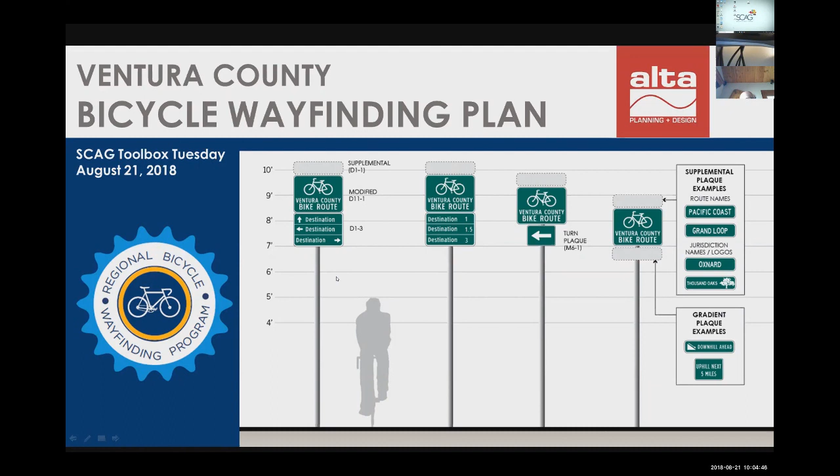The Ventura County Transportation Commission, a few years back, sought to fund more substantial and transformational bike projects within Ventura County, but there were a number of barriers standing in the way. One is that if you're familiar with Ventura County, we have a number of progressive land use ordinances that have kept all 10 of our cities very separate. There are no contiguous borders, so each city had a fairly developed...

I lost my presentation for a moment, but as I was saying, in Ventura County we have fairly restrictive land use ordinances that shunt all growth into cities. So there are large tracts of land undeveloped or in agriculture under cultivation between cities.

Because of that, each city has a pretty substantial bike network, but between cities, the connective tissue wasn't there—there wasn't a network of bike lanes to support a regional bike network or bike travel. There was no adopted bicycle master plan by the county, which would allow for development.

So VCTC undertook the task of putting together a plan, under the auspices of the Ventura County Bicycle Wayfinding Plan. One of the other things we wound up taking on, which you won't see in the slides but I'll talk about at the end, was that in Ventura County there's also no transportation measure providing local funds for match.

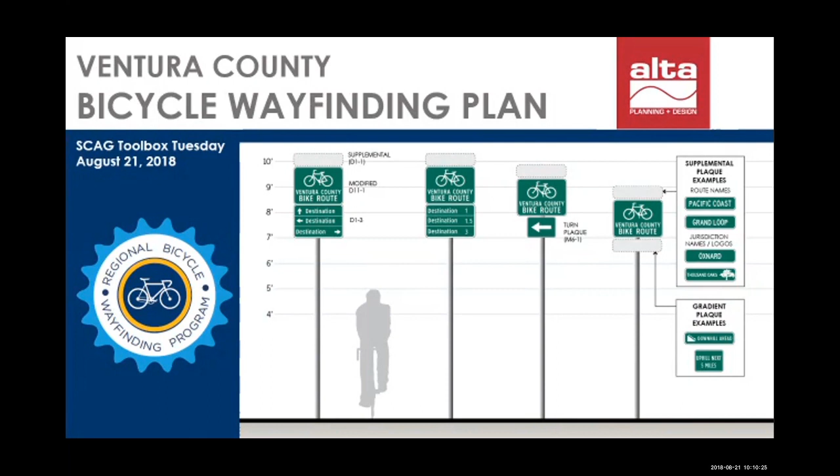Through the RFP process, we hired Alta Planning and Design to conduct our wayfinding study and to identify and prioritize a network of regional bike paths. Ultimately, it led to the adoption of 17 routes, 413 miles, with uniform signage throughout. I'll walk you through the process by which we did that.

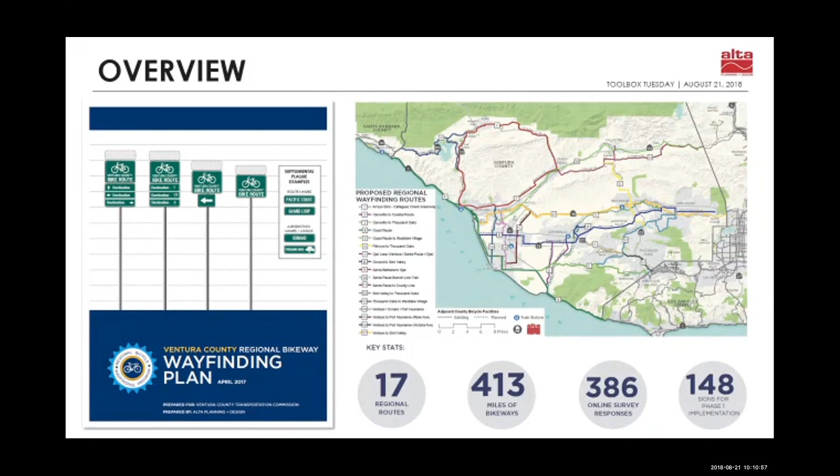We separated the project into three component parts. Wayfinding foundation—this is really the guiding principles for this project. The point of the project, and what we drove home, was connectivity between cities and between our neighboring counties, and connectivity by real users.

By that I mean we engaged real cyclists. We had city staff participating in the project, but more than that, we emphasized making sure we had real riders. We engaged local bike clubs and bike advocacy groups to ensure that we were capturing where people really wanted to ride rather than where the engineers thought we should put routes.

The second component was to really cinch down route paths, to know turn by turn where the routes were going, and then to prioritize them to aid in future development and funding.

Lastly, in the plan was a wayfinding toolkit. We designed signage that would be common throughout the county so that people would understand from community to community that the bike path was continuing on—that was more of an adventure than the previous two elements.

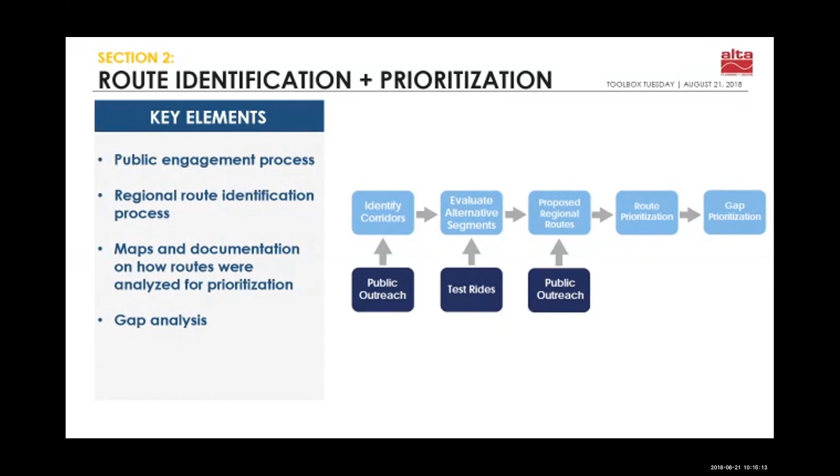We started intuitively, knowing roughly where the routes should go. So we started with 17 proposed routes, focusing on connectivity. We knew not all of the routes we proposed were suitable for building, but we thought this was a good place to start, and that we would deconstruct and reconstruct them as the project went on.

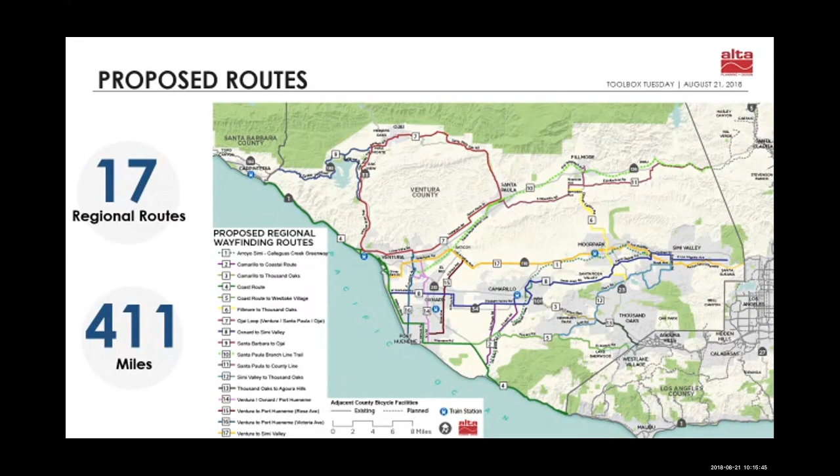One of the more non-traditional avenues we took for outreach was taking those proposed routes and all the existing routes within Ventura County and creating a bike wiki. We let the general public log into the bike wiki, draw their own routes, and provide comments. We garnered 278 individuals and some 686 comments, with people drawing their own routes, where they wanted to go, commenting on existing routes down to things like shrubs that need trimming, potholes, or a bad connection from Moorpark to Simi that should be rerouted. The range of comments gave us really great public input. We felt we had very tight, specific comments that allowed us to then propose much more succinct routes.

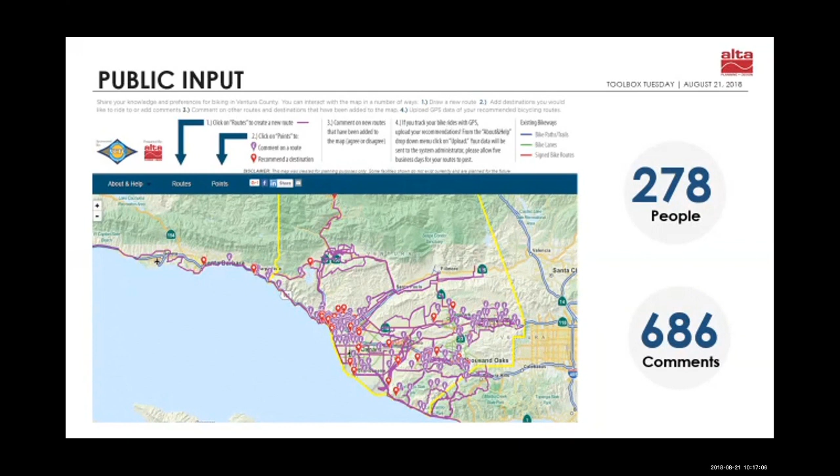Before you could log into the bike wiki, you had to take a short survey so we could identify who was commenting. Not surprisingly, most of our comments came from fairly confident recreational riders—weekly, very regular riders, most of whom felt comfortable riding on the road with or without shoulders. But at least we had a sense of who was commenting, and I think this is common throughout the region, where most riders are recreational. We did have some commuting public, almost 20% of respondents were commuters, but the vast majority were recreational riders comfortable on the streets.

We took all of that public input and our proposed routes and did an evaluation of those routes. We prioritized and evaluated the routes by a number of weighted criteria. We looked at route readiness—is the infrastructure in place? Are there shoulders? Are they paved? Could we pave them? Are we cut off from completing a route by any geographic feature? We have a very large grade that separates the county, so we had to find ways around that.

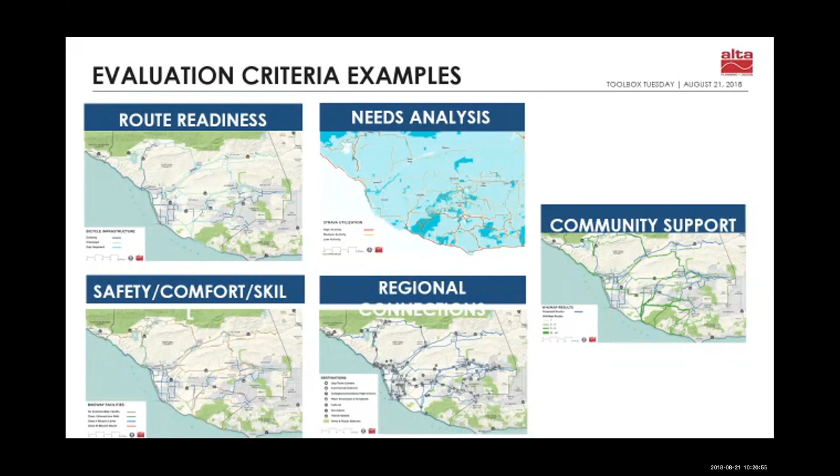The prioritization of the routes really helped in two main ways. It allowed local jurisdictions, especially the unincorporated county, to have some objective criteria when it came to investing in these routes. And this really helped later on when we changed the funding scenario and brought money to bear on route development.

The characteristics of high scores versus low scores: a high score would mean a high degree of readiness. There were shoulders wide enough to pave, it was a comfortable ride, it had good connectivity and heavy community support. A low degree of readiness meant there were maybe high traffic speeds, narrow shoulders, and less public support.

Because of the weighted scoring, this was not simply a popularity test. The highest route in popularity actually wound up scoring very much in the middle of the pack because it didn't serve as many people. It didn't connect communities as well as some of the others. So although it was popular, it ranked lower on the route.

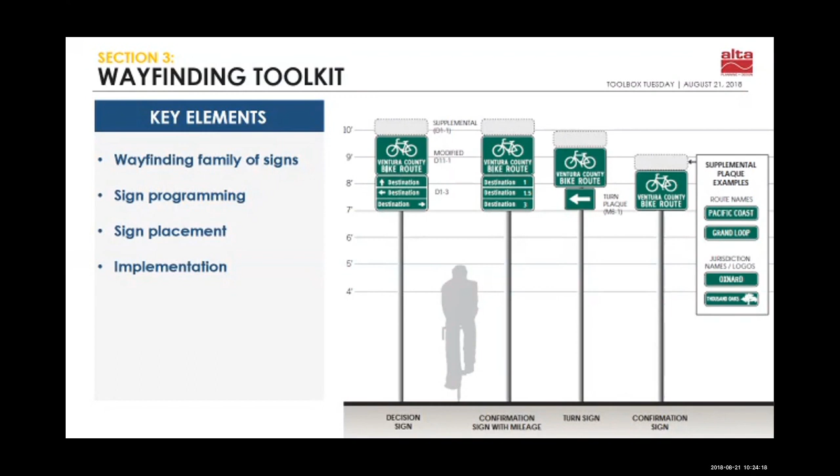The Oversight Committee actually adopted the signage in the Manual on Uniform Traffic Control Devices, the MUTCD, which we're all familiar with, and a simple modified D11-1 bike guide sign is what they chose to adopt.

What they wanted to make sure of, though, was that all signs had the opportunity for branding, so you could do a sign topper, so that if a jurisdiction chose to brand any particular route - and we have some groups in Ventura County working on bike tourism within the county - such as the Pacific Coast route, or a very difficult route that winds through the mountains and more scenic areas of Ventura County called the Grand Loop, we could put these toppers on top of the simple signs to identify those.

Also, it was found that simple warning signs for grade were really important, so very generic uphill, downhill signs were recommended. We maintained the standard MUTCD colors so that if you leave Ventura County, these signs would still be common on your ride. Although they're not terribly ornate or sexy, these were the signs our committee found would provide the best value and be easiest to maintain over time.

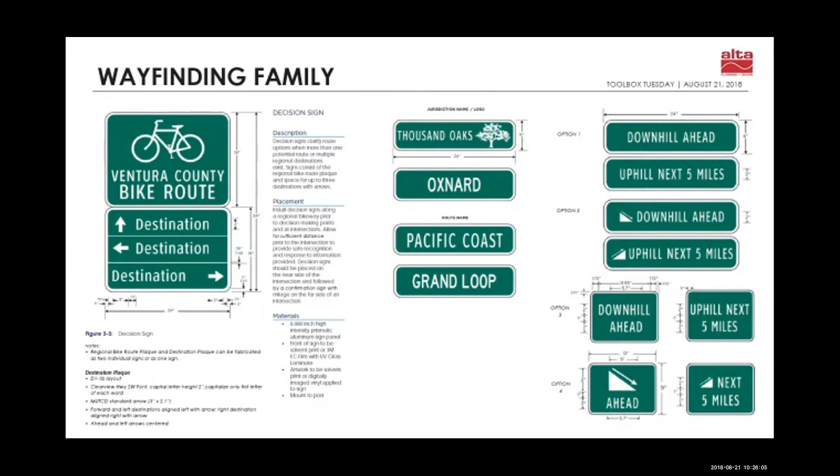We looked at 18 specific locations to inform communities of how things should be signed, and we created detailed instructions of how these signs should work, where they should be placed, how many feet from the intersection. This provided a toolbox that every city could use in terms of sign placement.

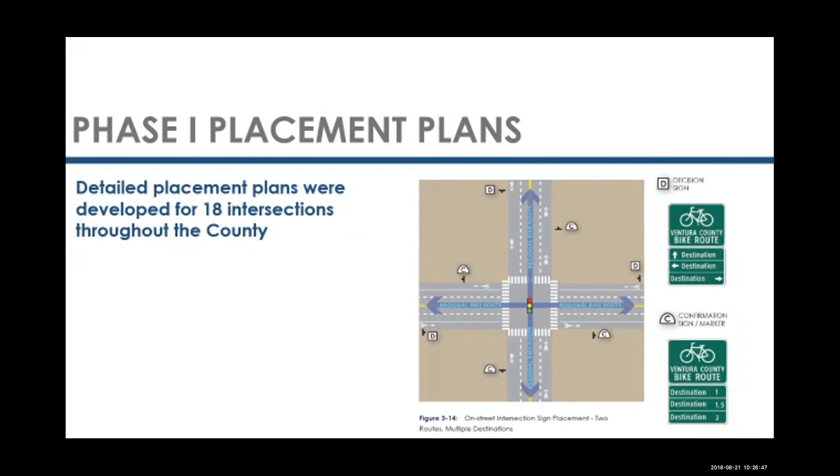We had funding for a number of signs as part of the project, and the committee selected 18 locations that would provide signage throughout the county and allow riders to make crucial turning movements. But as we started with that, the city sort of took over and started to put signs up on their own according to the plan.

One of the things that took us by surprise once signs actually started to go in was that in the committee structure and signage debate, we chose as a group not to name routes. We numbered the routes so we could discuss them for planning purposes, but the numbering convention was not designed to be a naming convention.

However, when signage came to implementation, a number of the communities really wanted to use the numbering system that the wayfinding plan had identified. So by default, the numbering system we used became the default route path. Then there were discussions to keep continuity with other designations, so since adoption of the plan, we've actually changed the route numbering system to match other naming conventions within the county.

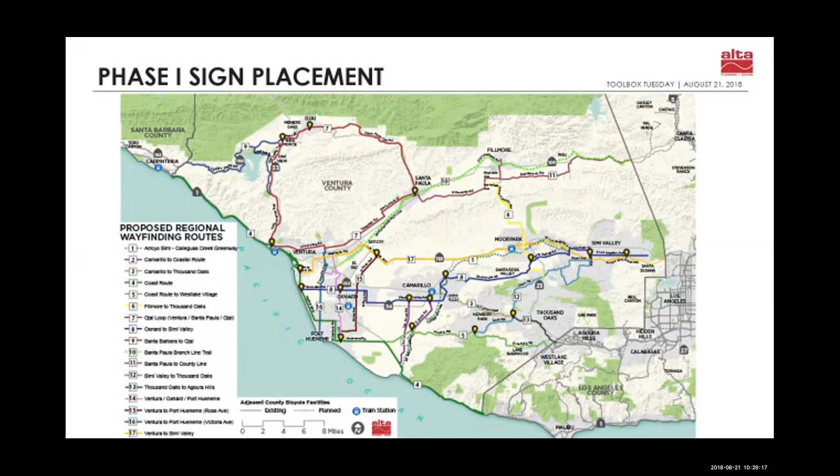Most prominently, if you're looking at this map, Route 4 goes down the coast. But of course, in California, we know that Route 1 traverses the coast. So we've since changed the wayfinding Route 4 to Route 1 to match the coastal route. That was an interesting turn we didn't anticipate, but we've accommodated that wish by the communities.

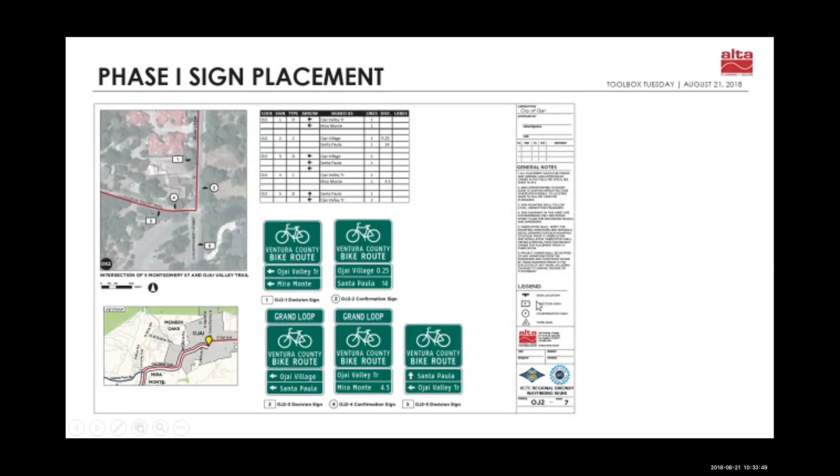Great, thanks Steve. So my name is Christopher Zhang. I'm from the Western Riverside Council of Governments, and I'll be discussing our recently approved active transportation plan.

Next slide, please, India. So I wanted to start off the presentation with opportunities and challenges in the WRCOG subregion, so that hopefully participants have a frame of reference while I describe the plan and the process. Next slide.

So when we discuss opportunities, we think about attractions and destinations, basically where people want to go via walking, biking, or driving. Contrary to the perception of the Inland Empire, we have a lot of opportunities here, I believe.

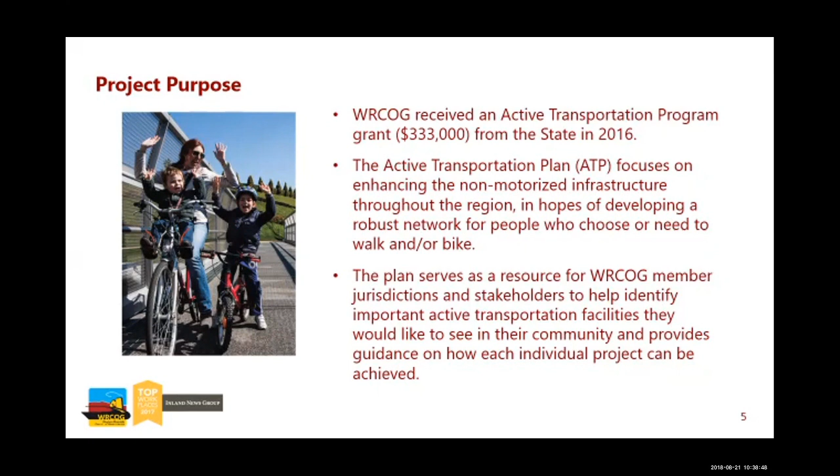As we developed the plan, we utilized our existing committees for outreach, including a monthly committee meeting with planning directors and public works directors of our member agencies as a sounding board. We also utilized stakeholder groups such as the Riverside County Active Transportation Network as advisors for input and feedback. In 2016, we established goals and objectives and developed a draft network, spending much of the last year refining facilities with agency staff and drafting the plan.

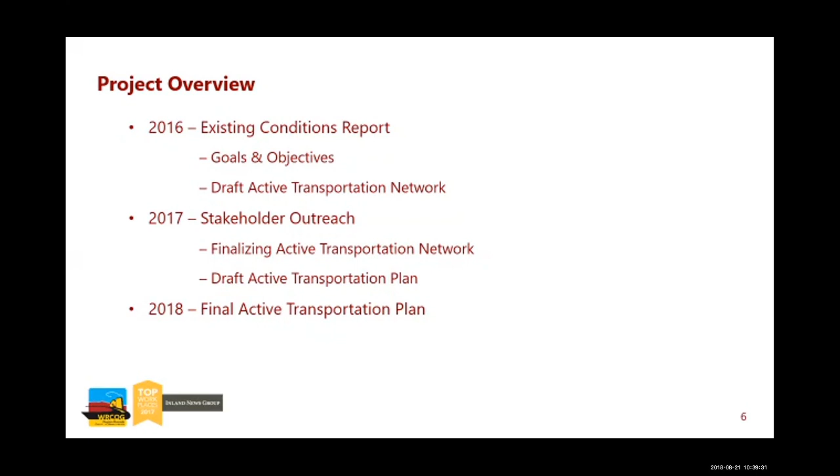The plan contains the listed items on the screen. I'll go into more detail in the coming slides, but one item of great interest to our jurisdictions was the collisions analysis, which is included in the plan—I'll get into more detail on that in the coming slides.

What we're really trying to achieve with the plan is just the beginning. We did a non-motorized transportation plan for Western County in 2010, but noticed that no projects were being implemented, so we wanted to take a different approach with this 2018 plan, which I'll get into a bit more.

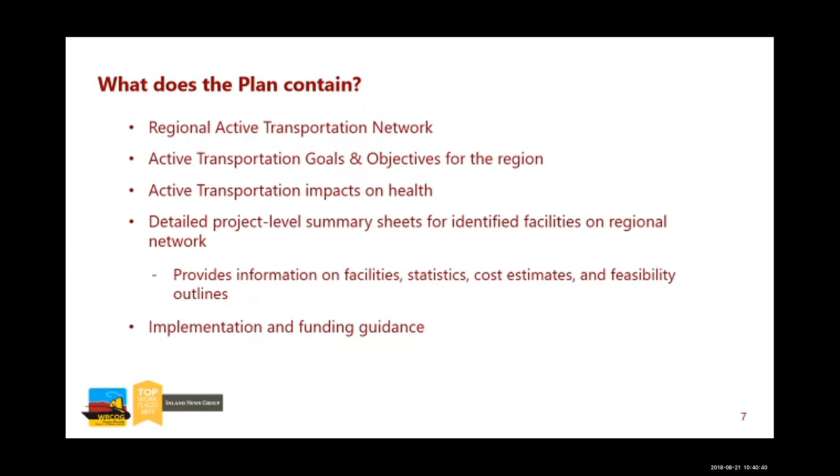What we're trying to do with the plan is provide assistance to our member agencies if they're really interested in providing additional active transportation options. This goes back to our goal—we're not trying to force anything upon our jurisdictions, we're just trying to assist those that would like assistance.

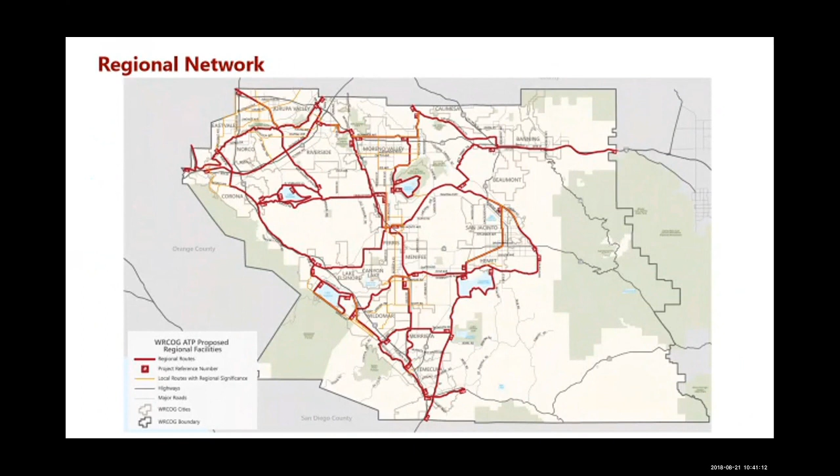One of the items listed was the regional network. Here's a look at the network identified with assistance from jurisdiction staff. We also looked at input from prior local and regional plans, collision review, and analyzed regional destinations, going back to the importance of analyzing where people are going and would want to go with what's offered in the subregion.

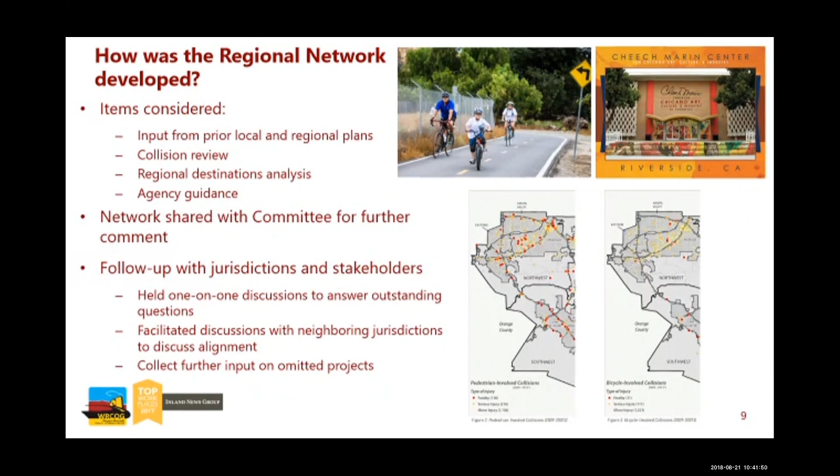This is what we really wanted to highlight with our active transportation plan: detailed project-level summary sheets for each identified facility on the regional network. We spent probably a year or more on these project sheets, because the information provided is what's required on the ATP application.

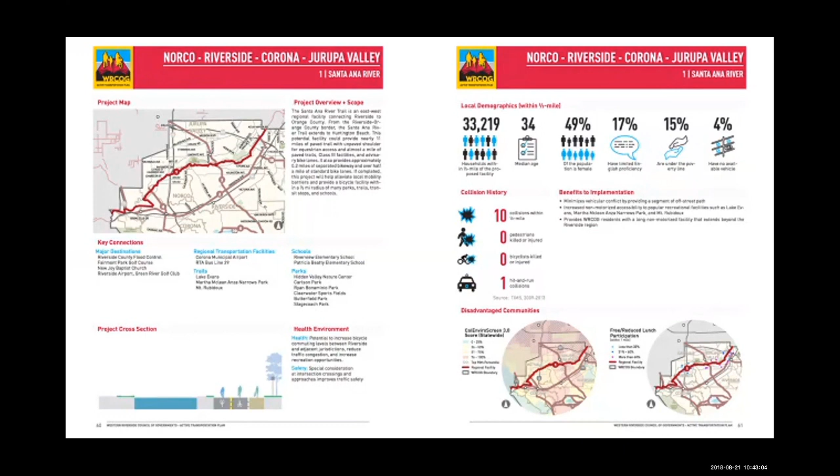We also included how the project fares for DAC, cost estimates, and feasibility items to consider when implementing.

One additional item that came out of the funding is bicycle pedestrian education and support. I came to WRCOG a bit after the project started, so this was kind of a surprise to me, but it's actually been a huge hit, and it's something we're trying to fund more.

We supported a few community events, conducted education workshops for cyclists, and conducted law enforcement education workshops with police departments. We're trying to find more funds to support these, as they've been pretty successful.

The plan also identifies a few next steps for WRCOG. We'll continue to assist our member agencies in seeking grant funding. We actually have a grant writing assistance program where we help member jurisdictions apply and execute the application—we just helped 5 of our member jurisdictions apply for ATP funding that passed in July.

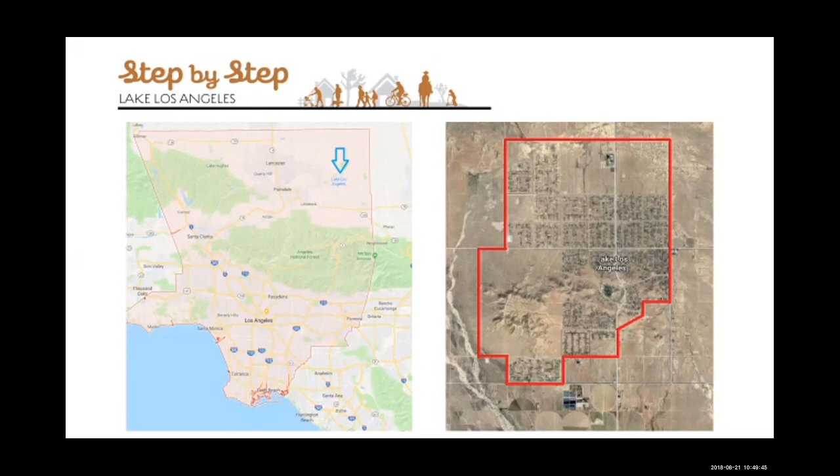The project staff from Antelope Valley Partners for Health and DPH have done community engagement for the past 2 years, broken out into 2 different phases: pre-draft and post-draft. The budget for outreach has helped ensure that the final plan reflects the community's needs and wants and has broad support for implementation.

So we've done a lot of different things. We attended existing events such as resource fairs and programming at local parks. We met with different groups such as faith-based organizations, local neighborhood action councils, and parent-teacher organizations, and held focus groups with people with disabilities, monolingual Spanish-speaking parents, and youth.

In addition, we formed a community advisory committee specifically for this project, which has met over 8 times and has representation from the senior population, local community leaders, people from the local council, and other folks from the Parks Association. We made sure there was Spanish-speaking representation in this committee.

Through this process, we also conducted trainings to do walk audits and pedestrian and bicycle counts with residents to help inform the plan and allow the community to participate in the data collection. They identified rates of walking, where people walk, and what they experience along their route. This involved the community in developing the plan, built awareness of the plan, and helped us focus on intersections and path segments that people are most concerned about.

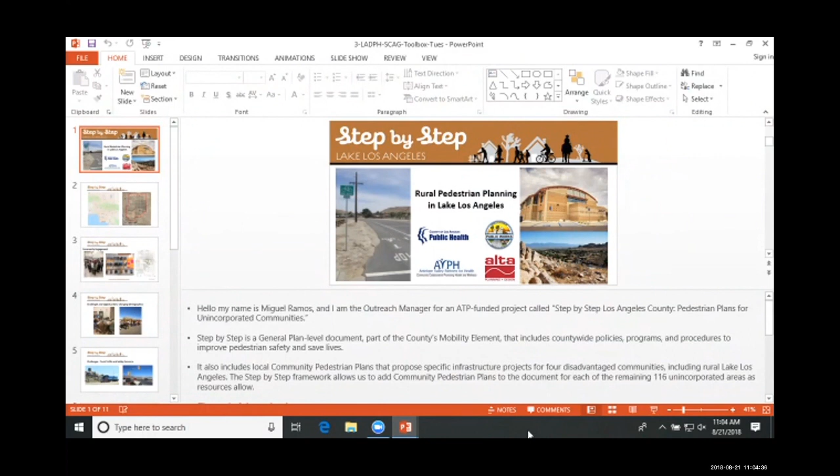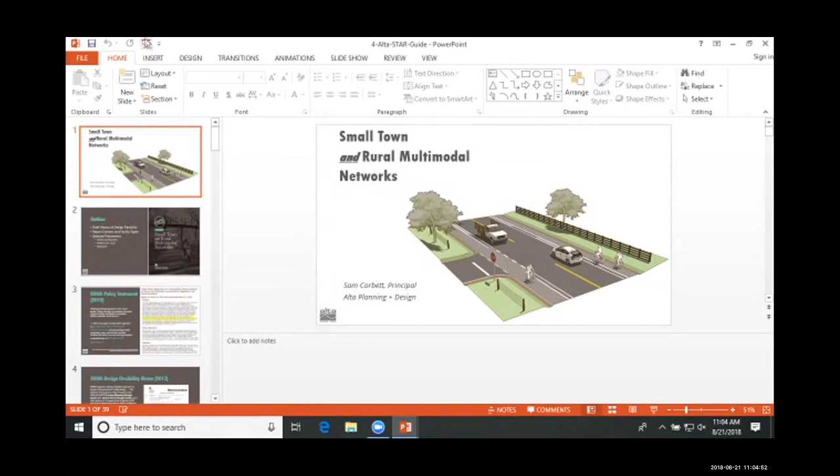So maybe I'll just get things started. I'll be presenting on the Small Town and Rural Multimodal Networks Guide. This was a document that we put together in coordination with FHWA a couple of years ago.

It's certainly a reference and resource that resonates with me as someone who grew up as a latchkey kid in a small town. I spent a lot of time walking and bicycling around my community. And like a lot of other small towns and rural areas, there's actually a fair amount of walking and biking that occurs despite a lack and oftentimes absence of facilities and infrastructure that actually support the activity.

Fortunately, many of the county roads or state highways that run through rural areas or small towns can be retrofitted or redesigned to provide a transportation network that better serves the safety, health, and economic interests of these communities. Next slide, please, India.

So just a brief outline of the presentation this morning. I'm planning to give an overview of design flexibility, briefly discuss the content and facility types that are presented in the STAR guide, and then I will go into a little more detail on a couple specific design treatments: the advisory shoulder, pedestrian lane, and side path. So first off, getting into design flexibility, if you could move on to the next slide, please, India.

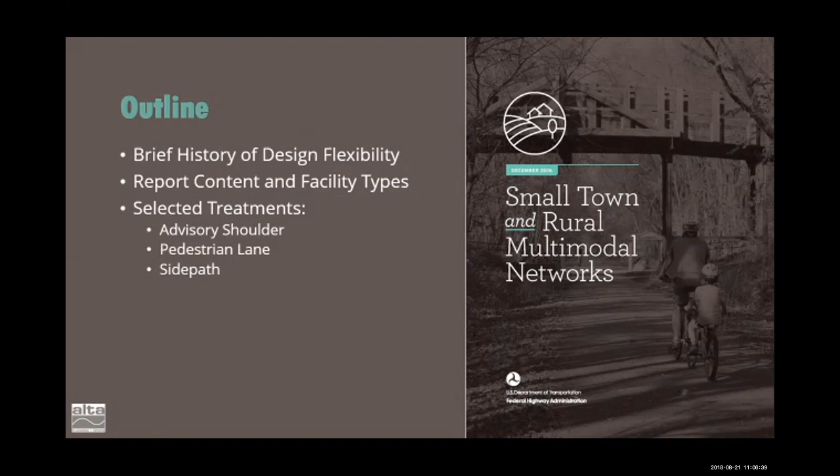So in 2010, FHWA released a policy statement, which was really quite a bold federal commitment to walking and bicycling. They talked about some of the benefits associated with walking and bicycling: better health, reduced vehicle emissions, fuel use, etc. But then they also went on to encourage transportation agencies to go beyond the minimum requirements. This really was a clear and unambiguous invitation for local jurisdictions to go further and to be flexible when designing for walking and bicycling.

And I guess the other key point here is the use of all ages and abilities. This is something that I think we've all heard of, but it's really about providing facilities and infrastructure that work for everybody. It's not just the people who are out there doing it now, but the people from 8 to 80, thinking about the more vulnerable users and the people that feel uncomfortable and aren't currently using transport infrastructure because they don't feel like it's safe or they're not comfortable. So that's really a key point.

FHWA followed this up in 2013. Could you move to the next slide, India? So they followed this up with the design flexibility memo, which really just reinforced the 2010 memo.

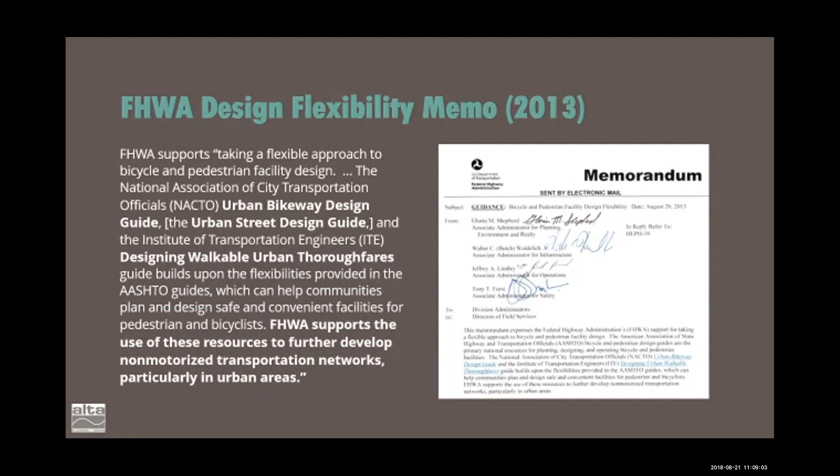Next slide, please, India. This next slide provides some of those references: the Walkable Thoroughfares guide and the NACTO Urban Bikeway Design Guide. There was also a companion Urban Street Design Guide put out by NACTO, and these were all great multimodal design references and guides, but they focused very much on urban or suburban environments, and much of the U.S., and certainly the SCAG region, fall outside of those categories.

Well, maybe a lot of the populations are concentrated in the urban areas, the much more geographic space is either rural or small town environment. So that's where the Small Town and Rural Multimodal Networks guide came in to fill a gap. If you could move to the next slide, please.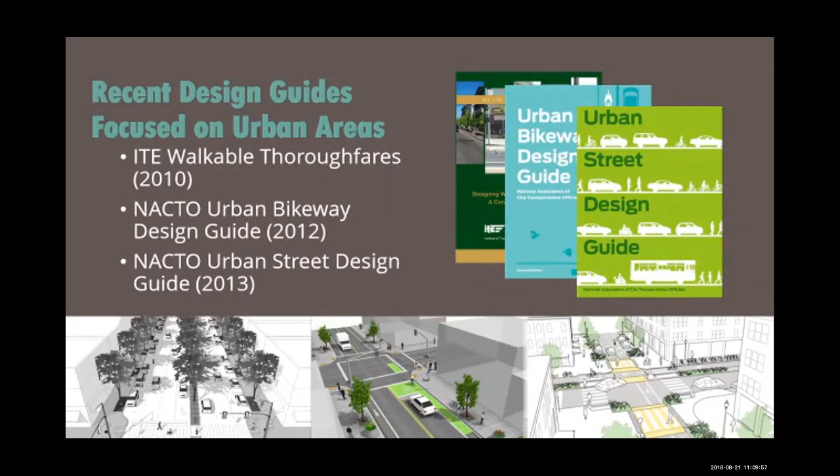So this was really a design guideline for the rest of us. It was intended to be context specific, applying to rural and small town environments. As I noted, about 3/4 of the 3,000 counties in the U.S. are rural, and it constitutes nearly 20% of the U.S. population.

As Steve mentioned in the first presentation, in connecting these communities, oftentimes you have a decent multimodal network in the small towns, but it's really important that you be able to have these regional connections too, so that people can get between towns or different communities through a more rural environment. So that was really the focus of this guide. Next slide, please.

So this just provides an overview of the guide itself. It's some sort of context of how to apply the guide, where the design treatments are appropriate. Chapters 2 through 4 provide specific guidance on the different facility types and treatments, and I'll get into a couple of them. The last chapters focus on network opportunities, and the final one is more of a planning, process, and project development section.

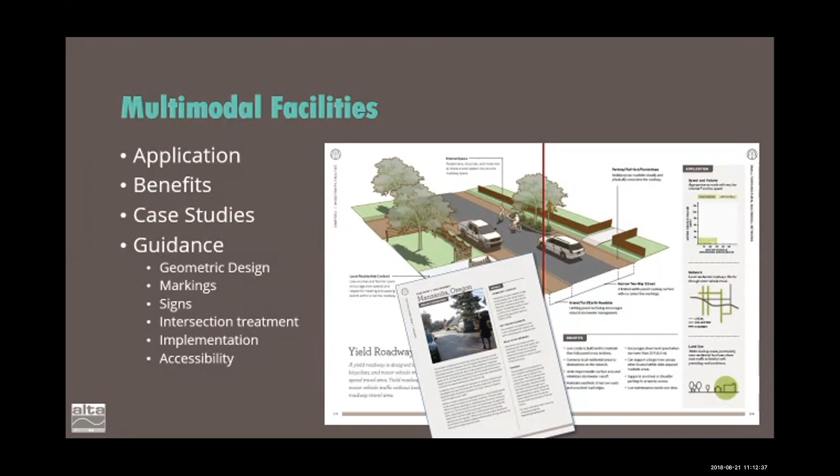Okay, next slide please. So there are 3 main categories of design treatments and facilities: mixed traffic, visually separated, and physically separated. You could think of this as a toolbox, with a number of different facility types in each category.

The mixed traffic category is really exactly that - it's not actually designating or delineating any specific space. Whereas as you move through, you have visual separation, and then lastly the fully separated treatment. You pick the right category and treatment for the context and facility you're working with.

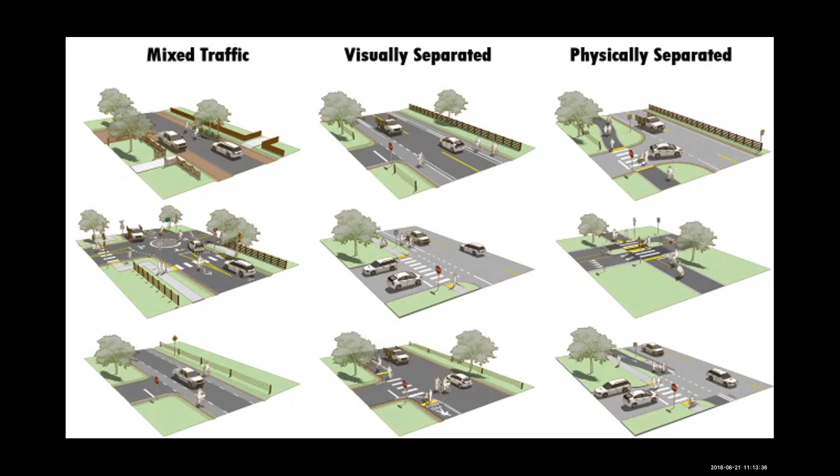Next slide, please. So just briefly, I wanted to go through the example application. This is all in chapter 1 of the STAR guide, with 3 key considerations for each of the design treatments. First is speed and volume.

For each of these treatments, essentially there is a preferred volume, or average daily traffic, and speed for the existing roadway. In this example, anywhere 3,000 vehicles a day or less is the preferred volume, and speeds of 25 miles per hour or less is the preferred speed. But it could go up as high as 6,000 AADT or as high as 35 miles per hour.

The next category is the network type, broken out into local roads, collectors, and highways. The last consideration for the application of the design treatment is to look at the land use surrounding the area, broken into two categories - small towns, the built-up areas, and the rural area connecting the small towns.

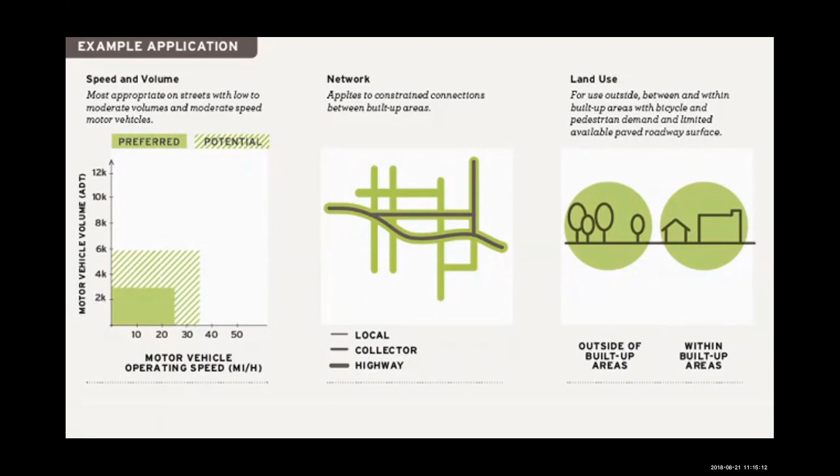Next slide, please. I think I mentioned this earlier, but it really is the basis of the whole guide - these real world examples. These are all treatments that are out in place. For each of the treatments, we provide valuable case studies that present some of the benefits, some of the project background, how they came to be, what the design looks like in that specific instance, what sort of network role it plays, and any funding considerations tied to the project, or how they developed and implemented it.

Okay, next slide, please. So now I'll get into a few of the specific design treatments. As I mentioned, there are 3 that I'll cover in the presentation - there's obviously a lot more in the guide. I tried to pick the ones that are either more controversial or different from existing guidance.

The first of which is the advisory shoulder. It's probably the most controversial treatment in the whole guide. And then I'll briefly discuss the pedestrian lane and the side path.

So the advisory shoulder is a treatment used when you oftentimes don't have the width, the cross-section curb-to-curb width, to actually stripe a bike lane and maintain a travel lane in each direction. This is an application that has been implemented in a number of different communities around the country, and I'll get into the specifics. Can you move to the next slide, please, India?

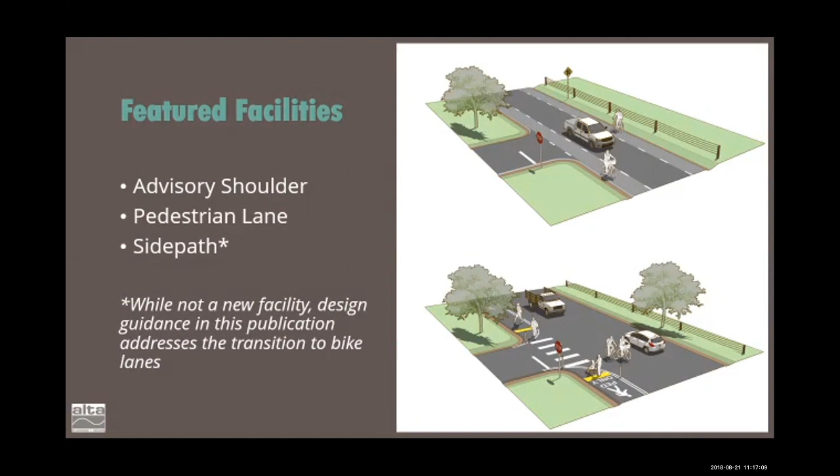So this graphic shows the advisory shoulder and what the treatment is. Essentially, it is a center travel lane, so it's really just one lane. There's no center line. There is a shoulder striped on each side that provides space for cyclists, but is also used for passing vehicles. So the idea is that when the center lane is too narrow for vehicles, they're intended, when there's no pedestrians or cyclists in the lane, to go into the shoulder to provide enough space for traffic if there's an oncoming vehicle.

So it's all about context. As mentioned in the previous slide about application, this is intended to be on fairly low volume, ideally less than 3,000 ADT, and fairly low speed, ideally less than 25 miles per hour.

Next slide please, India. Should note that this is not an approved treatment by FHWA, but as I mentioned, it is in place in well over a dozen communities around the country. It is required that you go through the request to experiment through FHWA. This is section 1A10 of the MUTCD.

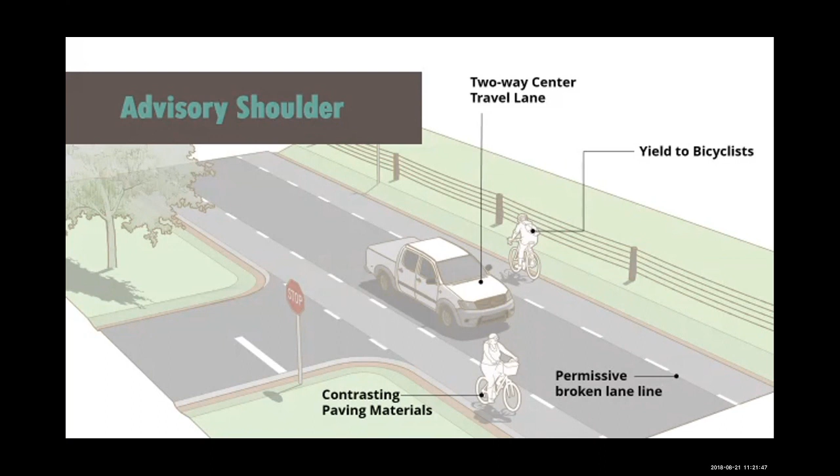The next treatment I'm going to is more specific to pedestrians. Next slide please, India. Again, just a little more guidance on this: the center lane is typically between 10 and 18 feet in width, sort of by design. If you're doing anything more than that, you probably have space to actually do just standard bike lanes on each side while maintaining the two travel lanes.

I think I've covered all of this off. As I mentioned, the ideal AADT is 3,000. We published a white paper last year that looked at a dozen different installations around the US, and the highest AADT that we saw in those installations was 4,500.

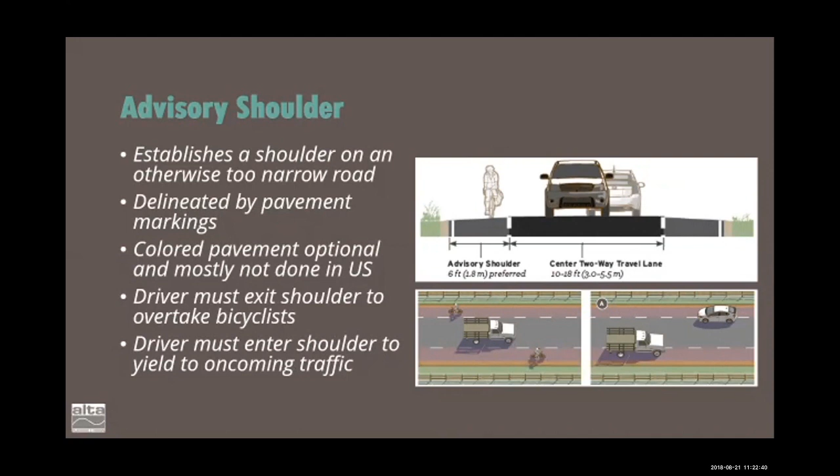Next slide please. Just a couple examples of where this has been put in place. So this is the sign that has been used, specifically from Hanover, New Hampshire. And it shows the intent of this treatment, how when another vehicle's coming, the vehicle merges and yields into the shoulder. It's kind of interesting in this case, while they're not marking pedestrians or cyclists in the lane, they are acknowledging their presence on this sign. And once again, this isn't a standard sign, it's sort of a unique sign that they developed for this particular application. Next slide please.

Okay, so this is just a photo from Hanover. Hanover is where Dartmouth is, so a small town in New England, a college community. There was a fair amount of community engagement and involvement with this before this installation went in place.

Next slide please, India. This shows the same treatment, but with pedestrians on the shoulder. And it's probably worth noting that California law requires that when there are no sidewalks, pedestrians walk against the flow of traffic.

So while these kids are not in California, they are actually abiding by what our laws would be. This is a useful facility for both pedestrians and bicyclists, and it can be done at fairly low cost when you don't have the width or right of way to actually put in sidewalks or bike lanes.

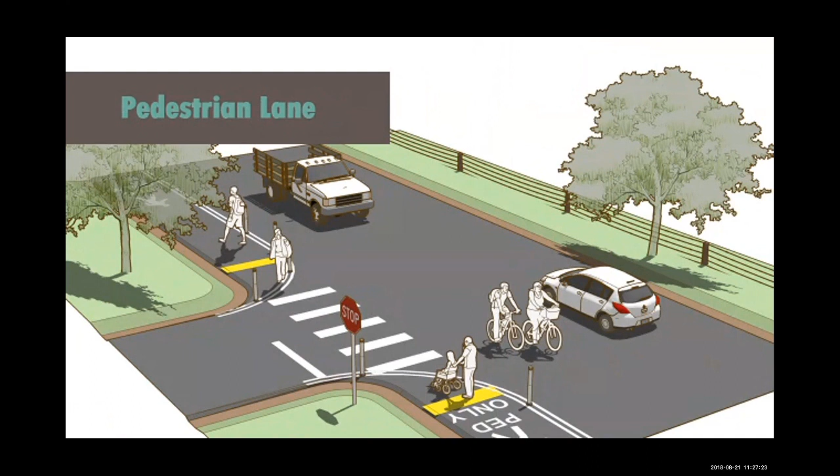I'm going to just briefly cover two other treatments. One being the pedestrian lane. This is another, probably more significant, piece of guidance in the guide. It can be effective for delineating a pedestrian corridor without incurring significant capital costs that would be associated, say, with putting in sidewalks. Sometimes more rural communities don't want sidewalks; they don't feel like it fits the nature of their community.

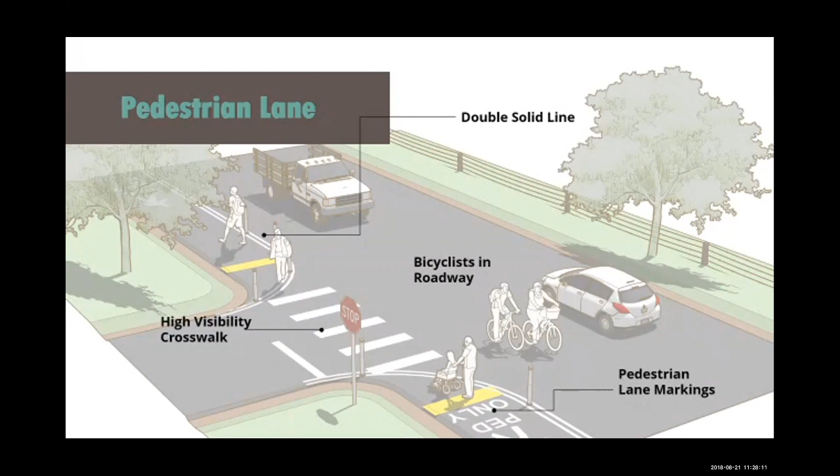Oftentimes these are put in as an interim or temporary treatment. I should note that there are a number of considerations with this type of treatment. One of which is the detectability for people with vision disabilities. Another is that bicyclists may want to use the facility, so it's always a consideration in design. Certainly the accessibility requirements as well, so the cross slope requirements need to be considered, making sure they're not exceeding the 2% maximum as per ADA. And then also the surface type, ensuring that the surface is firm, stable, and slip resistant.

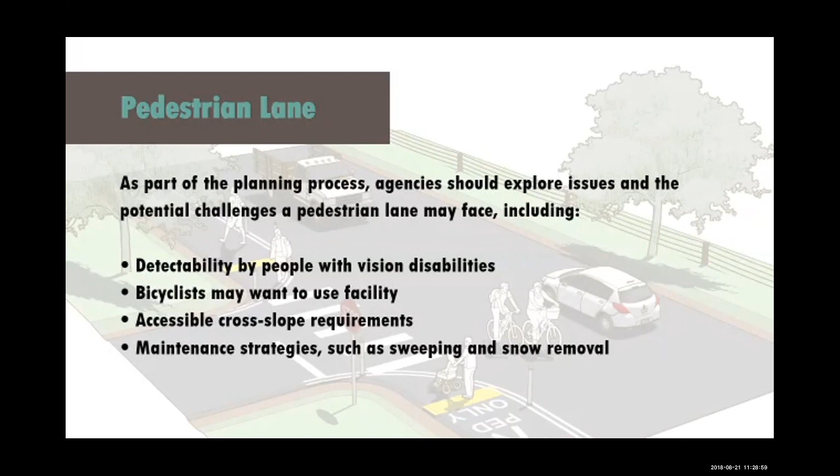And of course, other maintenance issues like sweeping or snow removal in colder climates. As I mentioned, often these are put in as a temporary treatment, or certainly a low-cost treatment, and they can be quite effective at filling a gap between two key trip generators or attractors. The minimum width is 5 feet. If it's a busy corridor, we recommend going up to as high as 8 or 9 feet to ensure enough space for people to walk 2 to 3 abreast.

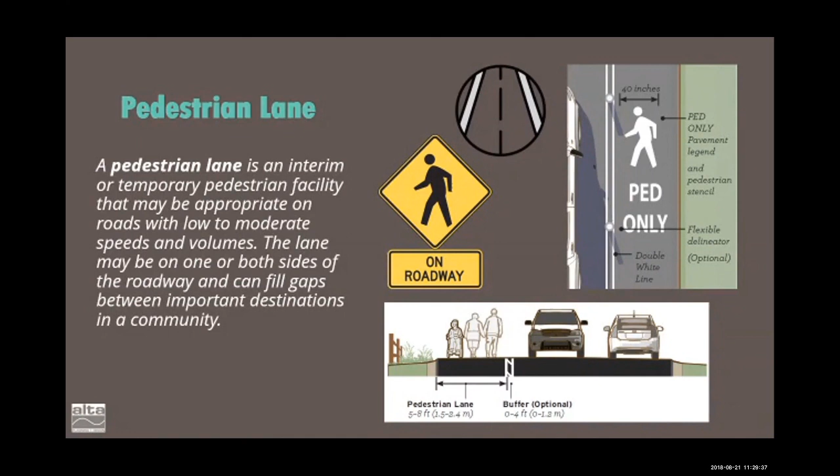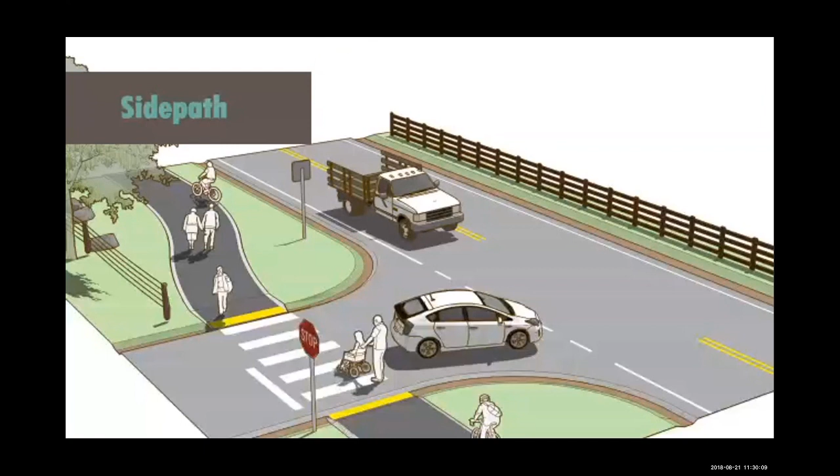Last treatment I wanted to cover is the side path. This is not a new treatment, but it has had kind of a turbulent ride over the years, particularly due to concerns with crossing of driveways, cross streets, and any other transition where there is potential conflict. But pedestrians and bicyclists have always responded quite well to them because they provide this sort of dedicated space that is fully separated from the road corridor. So in our experience, many of the concerns raised with side paths can be mitigated effectively with good design.

So just want to go through a few of those specific designs.

So here this highlights what we refer to as the bend out treatment. One of the benefits of the bend out, that curve you can see on the left side of the slide, is that for a vehicle entering or exiting the cross street, it breaks out their decision making. They have the decision at the limit line, right before the high visibility crosswalk, to look both ways for pedestrians or bikes. Then it separates that decision from their actual merge onto the main road, as opposed to having it right up against the road, where oftentimes the driver is already thinking about merging into the road.

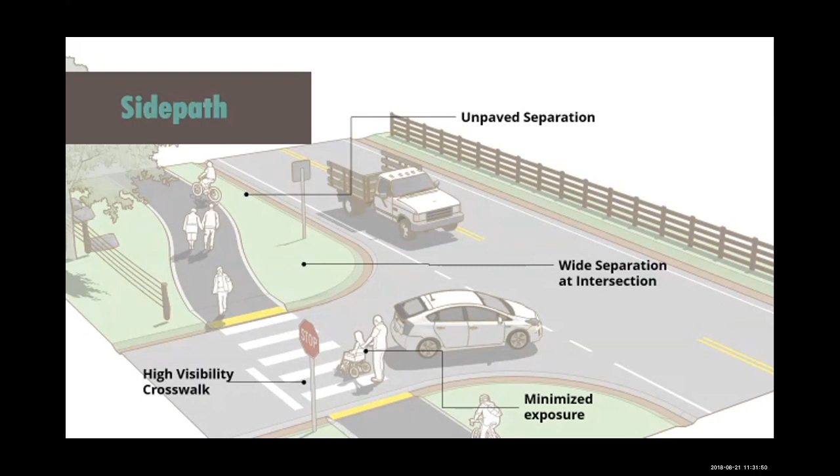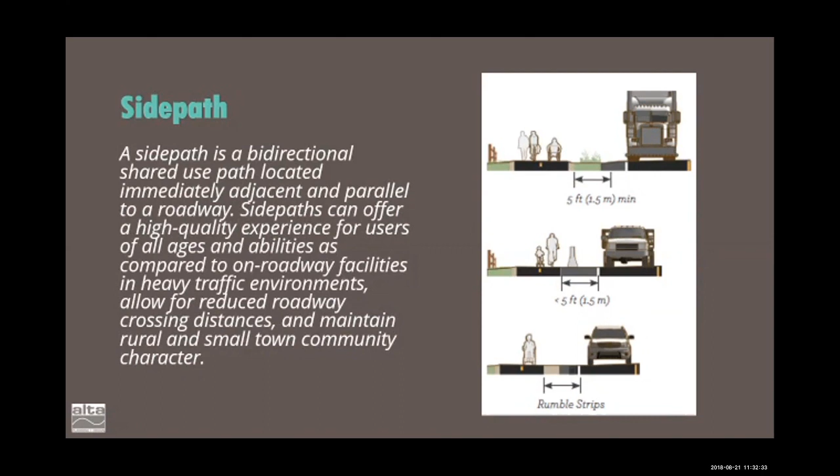Okay, so again, a lot of this side path design does exist. We're providing more specific design guidance on how it can be effectively implemented, focusing on separation distances, how you deal with minor intersections, and other transitions to other facilities. That's often the challenge, how when you have a side path that merges into shoulder facilities or bike lanes, you actually handle that transition. The next slide provides one example of how that can be done.